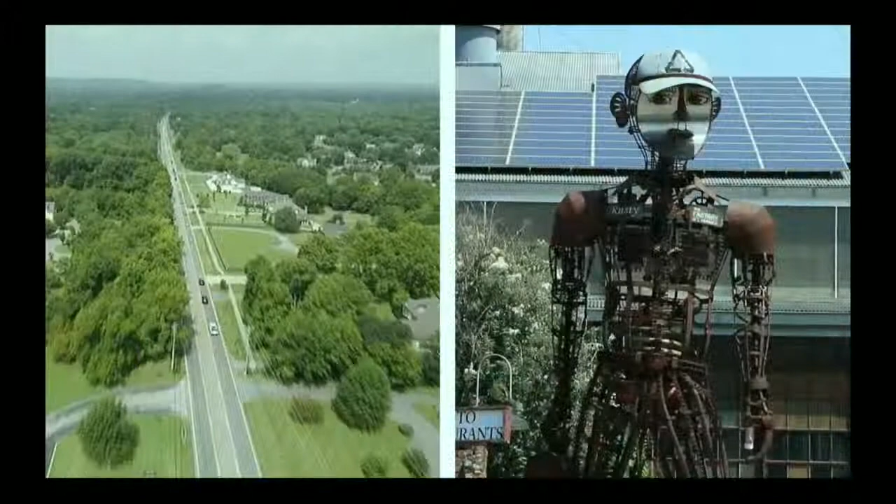Your concept of short is? Two minutes. Okay, thank you, Greg.

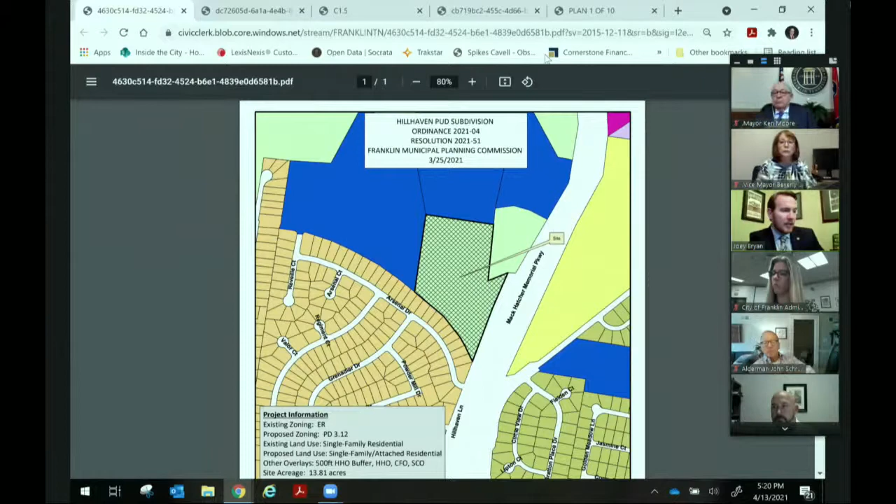As a note, lot 11 is one of the proposed single-family lots, but its location has more than 14% natural slope, which goes against the regulations of the zoning ordinance. So as a condition of approval, lot 11 must be removed from the project. With that, the Planning Commission recommended favorably by a vote of 7-0, and staff recommends favorably to the board, mayor, and alderman to approve with conditions.

Thank you, Joey. Any questions from the board? I think Mr. Gamble wanted to make a comment.

Hi, my name is Greg Gamble, and I'm joined in this meeting tonight with Wayne Weaver, who is the new Director of Community Housing Partnership, and we're so excited to have the opportunity to work with him. Right now he's kind of drinking everything through a fire hose, moving as fast and furiously as possible. Also with us tonight is Scott Harrison, chairman of the board for Community Housing Partnership, and Bert Morton, with CEC Civil Engineering.

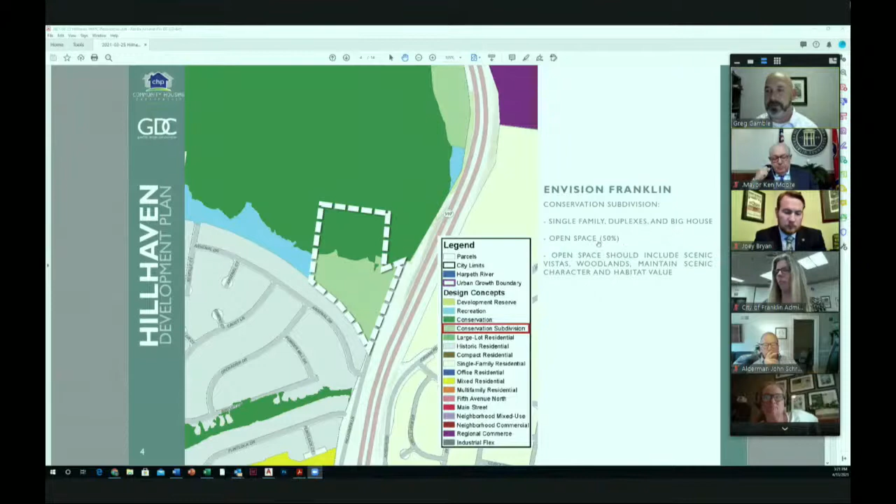I have a real quick presentation to update you since we last talked about Hillhaven at the Joint Conceptual Workshop. As you may recall, Envision Franklin identifies this property as conservation subdivision and allows for single-family duplexes and big house architecture. The open space requirement is 50%.

The master plan has a total of 68.7% open space and includes the Hilltop Preservation Area, as well as stream side buffers and a 150-foot scenic corridor along Mack Hatcher Parkway. There are a total of 8 big houses shown on our plan, as well as 7 single family lots. When Joey referred to lot 11, it's this lot right here, and this lot will be removed as a condition of approval, and we're not objecting to that.

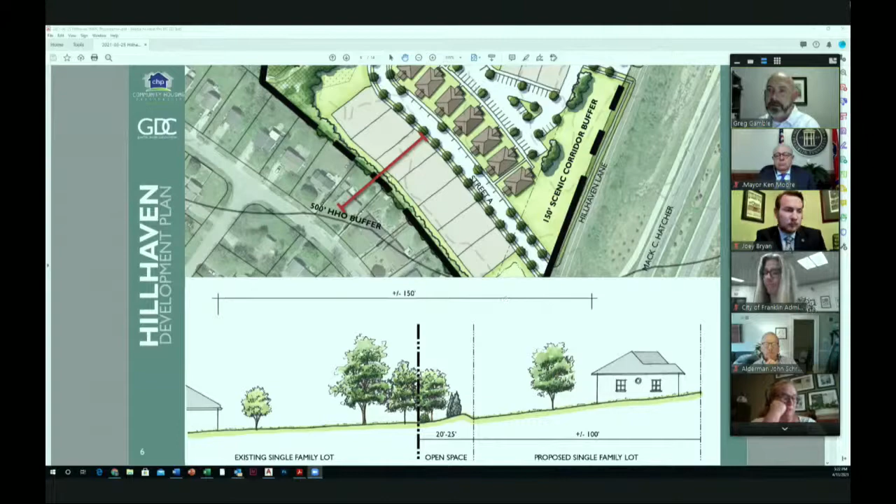With our master plan and the existing site, there's a lot of stormwater running off the hill, off this slope, and right into our neighbors' backyards over here on Arsenal Drive. We're going to introduce a 20 to 25 foot open space area that will include a berm and a swale to redirect that stormwater to our stormwater basin located along Hillhaven Lane, correcting a lot of sheet flow that's causing problems with our adjacent neighbors.

I wanted to give you a little bit of background on this big house.

The zoning ordinance labels it as a multiplex building type, with a maximum of 4 homes per building. We started with a building that's 2 stories tall on Arsenal, which has a width of about 41, 42 feet.

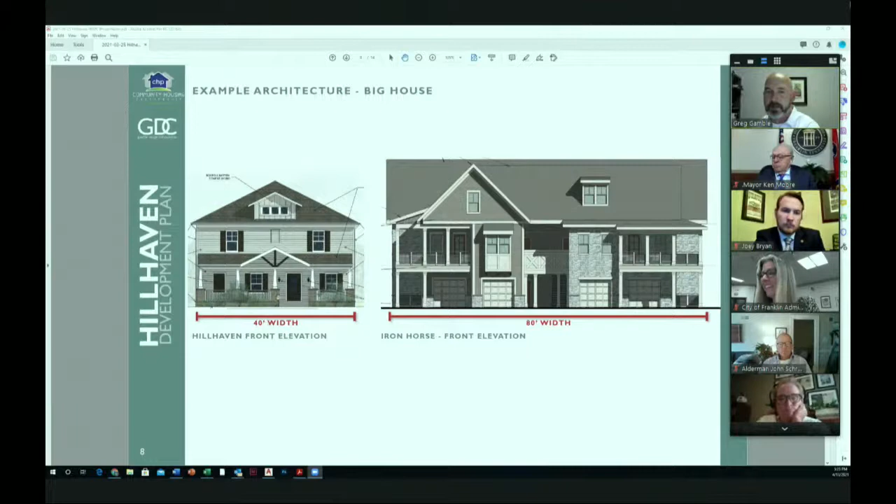We said we want to be compatible with our neighbors, and so this architecture has a width of 40 feet. In comparison, the Iron Horse buildings that are only 2 stories tall have a width of 80 feet, so you can see how the Hillhaven multiplex building is really

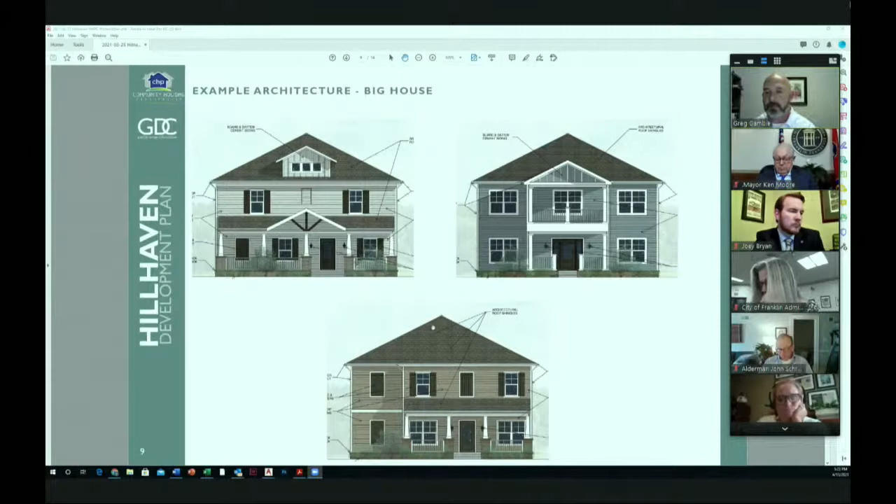designed with more compatibility to the existing neighborhood that it's in today. Our architect is continuing to work through various elevations, showing some diversity in architectural styles. The Planning Commission did ask that final elevations of the architecture come back to them with the site plan, and we're happy to do that. We're continuing to work on final design of the architecture for not only the big houses,

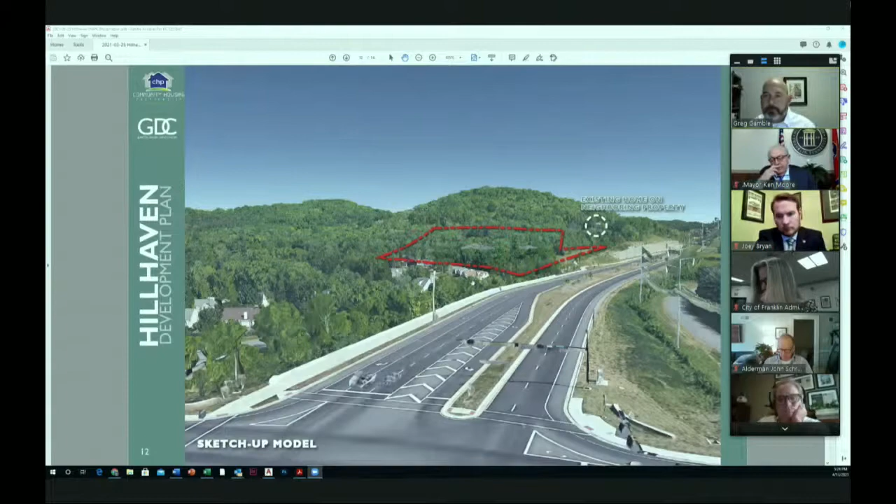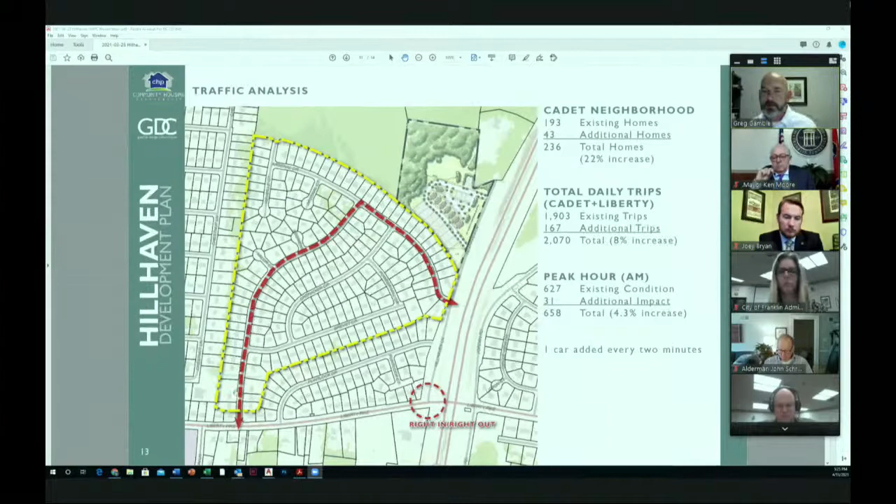At peak hour, which happens to be the AM hour where the most traffic is at this intersection, there's a total of 627 vehicle trips. We'll be adding 31 trips to the peak hour, an increase of 4.3%, about one car added every 2 minutes to this intersection. So really low impact, low additional traffic volumes there.

But we're happy to answer any questions you may have. Mayor, and I'll yield back.

No questions. Joey, did you want to add anything as far as development plan or impact fee? Or did I hear somebody want to ask a question? Vice Mayor, did you want to ask a question? Yeah, I did. Go ahead.

Can you go over, Greg, pull that map up again and tell us where that stormwater basin is? Okay, where's the road going into it? Right there, can you point to it? The road is, it's hard to see, it's so small.

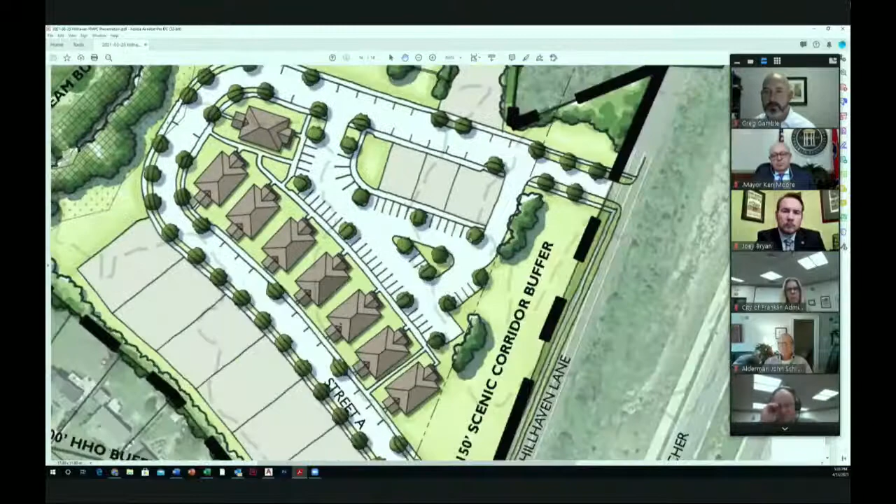Hello? I can't hear anybody. I don't know if you're on, Greg, or not. Nobody's saying anything yet, but there's your stormwater basin. All right, so yes, here's the stormwater basin located here in the lower left corner.

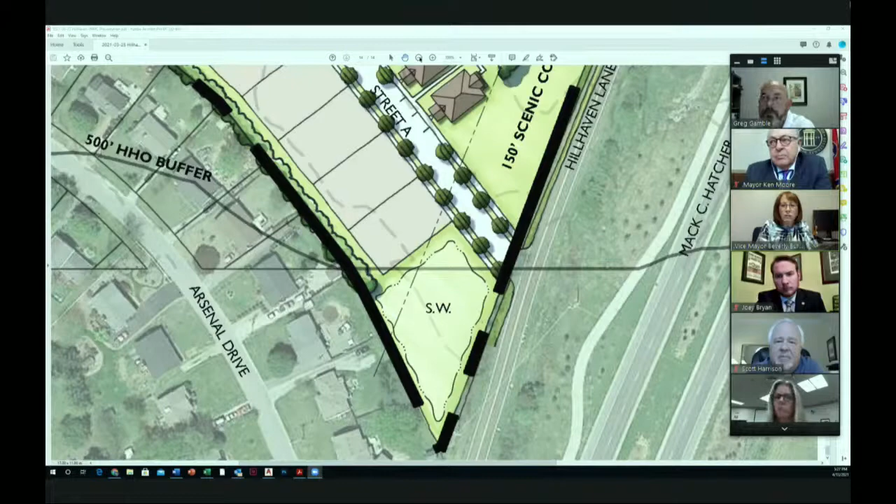Yeah, I don't understand why we continuously put stormwater basins on these roads. That's the first thing we see. It seems to me that we're becoming a city of stormwater basins all over the place, and I don't think they're attractive to put out front to see on a development. I just think we can do a better job, but I don't know. You're driving into it there, and that's the first thing you see.

And we have to follow the terrain and topography on this plan. Right, water runs downhill, it is. It's running downhill this direction and then running across down here in this direction. So I know it has to, but how is that designed? I mean, is it retention or detention? It's detention. There will be no standing water in this.

Detention. So how are those culverts? I've seen so many culverts all over town that are just huge. And I mean, it's what you see. Instead of putting it into the side of the hill and hiding them, doing a better job of them, how are we regulating that? I just have some questions about that because I don't think we're doing a really good job with those.

When looking at a development of really any size, every 2 acres has to have its own water quality feature, whether it be a bioswale, rain garden, or some kind of water quality device that cleans the water. Ultimately, you have to detain water on your site if you're creating more impervious surface. So this is really more for the detention of the stormwater after it's been treated through those water quality areas.

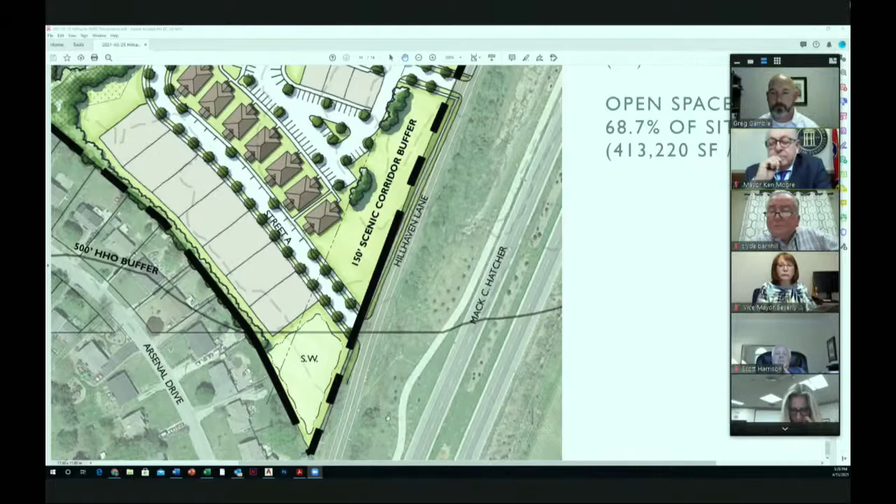I just wanted to bring up that the 2019 zoning ordinance and our zoning ordinance today does have material requirements for those walls associated with the culvert, so that they should be clad in brick, stone, or natural stone, because we realize the appearance of some of them in the past have been less than aesthetically appealing when visible from roadways. And Kelly, the culverts in those areas, they're supposed to be set back into the hill, not stuck way out. And then you have this.

So is that also the case, that they're supposed to be back in towards the bank of the hill? I would defer to the engineering department for that type of question. The zoning ordinance really relates to what the cladding should be on the stormwater features.

Well, I would just make the comment, we don't need to discuss it any further. I just would make the comment that engineering ought to take a look, stormwater, take a look at that. So when it's developed and designed, that it's put back into the hill. I think that's where it's supposed to be. And a lot of times they get put out, so they're massive and they're visible. And I just think we should address that. That's all. Thanks.

And it's definitely an engineering issue. So, they can address that. Thanks.

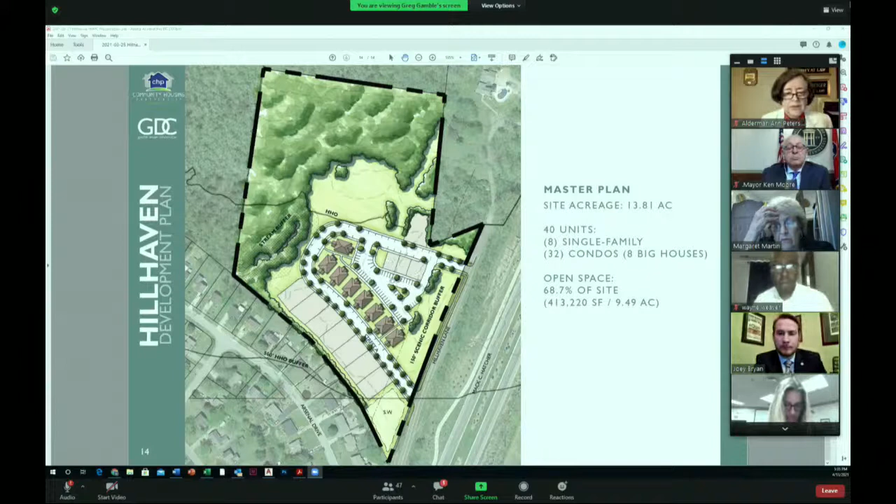Not covered parking. No, parking just for the residents.

There's minimal impact on the traffic from this development. And of course, that's a very unusual intersection with Hillhaven and Liberty. So is this just maybe the chance to improve that access management there by forcing a right in, right out? We didn't have that previously, I guess.

I'm happy to answer that. We really didn't feel comfortable with the proximity of Liberty Pike and the Mack Hatcher intersection there with the entrance here on Hillhaven. It's something that was done when Mack Hatcher was built many years ago. And we've noticed some dangerous turns - left turns in and out of there are typically your most risky movement. So reducing that, any additional density just increases that risk.

So taking that out to a right in, right out, still providing access through the existing neighborhood seemed to be the safest approach. And Alderman Speedy, we pulled the accident report for that intersection in 2020 alone. There were 10 accidents. They were all minor, thankfully, but there were 10 accidents at that intersection.

Okay, we need to move along. Did anybody have any questions about the parkland impact fee? If not, we're going to go on to item 6.

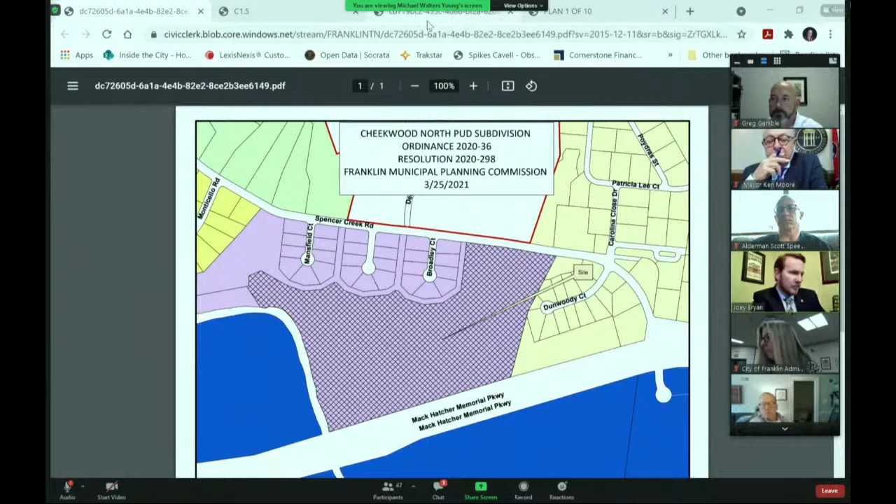The current administrative and recreational services on the property will be relocated to the Cheekwood South PUD subdivision on the southern side of Mack Hatcher. So for the Cheekwood South, the subject property consists of 53.52 acres. Again, it is for a new golf course and facilities for the golf course.

The property is owned by the city of Franklin and currently vacant. Envision Franklin places this parcel in the recreational design concept. Per Envision Franklin, this concept supports both private and public recreational opportunities. It further states that new development should be interconnected through bike lanes, multi-use path, and sidewalks.

The plan as proposed provides a safe connection to the parcel on the north side of Mack Hatcher and connects with established local trails as well. In addition to the course itself, the administrative offices, clubhouses, and pro shop for both this development and the Cheekwood North are located on this property.

Any golf balls that are hit into the surrounding jurisdictional features, including wetlands, river streams, and others, shall be considered an illicit discharge, followed by notices of violations and civil penalties per the City of Franklin Stormwater Ordinance. Therefore, the city will require additional information regarding nets for the driving range at the site plan submittal to ensure that proper protection of the Harpeth River and surrounding wetlands is maintained.

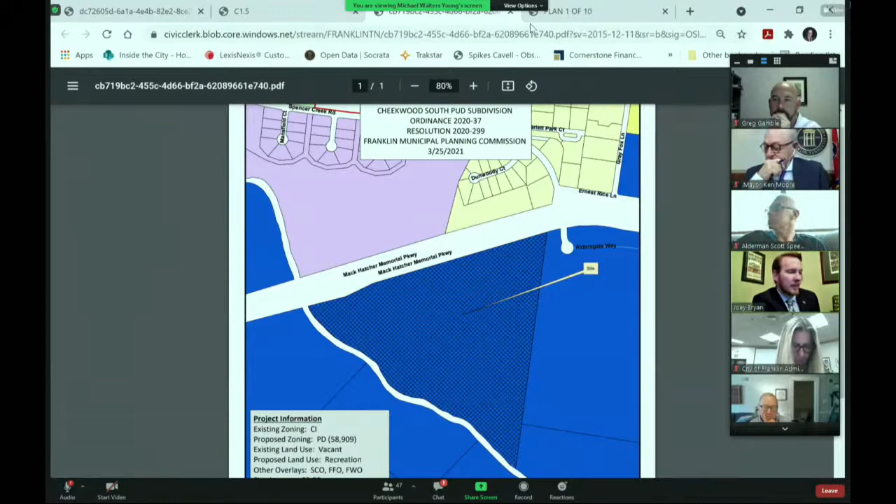So Planning Commission unanimously recommended approval, and staff recommends approval as well. Happy to answer any questions. Thank you.

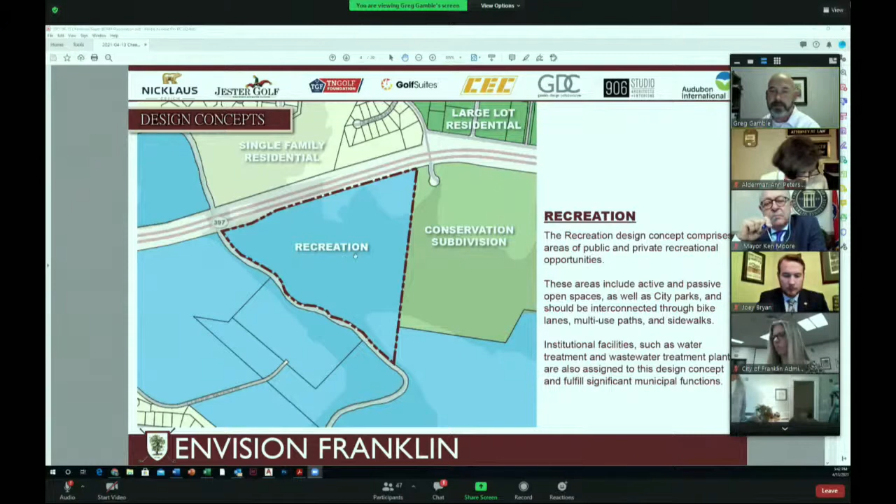The property is being looked at and designed as a master plan with both the north and the south of Mac Hatcher. There will be a golf cart connection between the two that will be underneath the Mac Hatcher Bridge. We're talking specifically first about the south side, which in Envision Franklin is identified as recreation design concept.

We are requesting a rezoning to planned district, as Joey mentioned. This starts to paint the picture about how these properties are master planned together. We are going to be relocating the existing clubhouse that is directly off of Spencer Creek to the south side of Mac Hatcher. The access will be off of the existing cul-de-sac here at the signalized intersection.

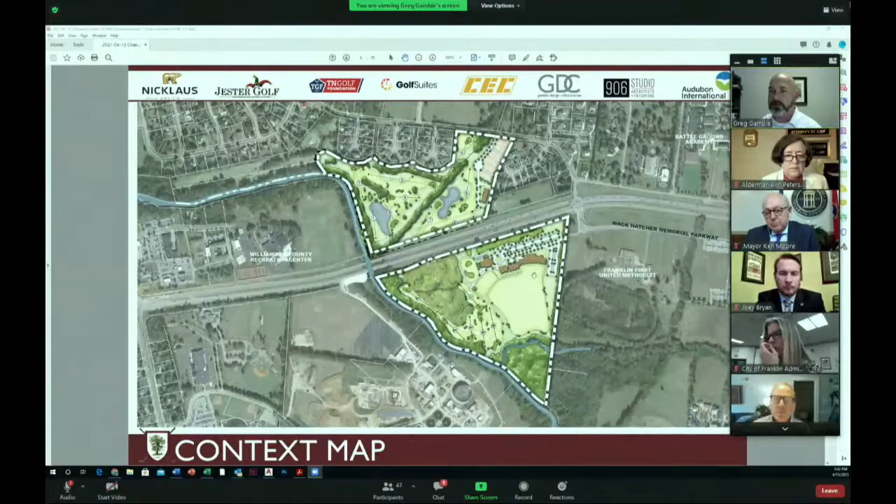The south side will include a driving range, as well as a chipping area, a new large putting green area, and a player development course designed by Nicklaus Design. The facilities will include a clubhouse with covered hitting bays, a golf performance center, the golf house, golf hall of fame, and the golf pro shop.

I'm going to turn it over to Mike Hathaway, who's going to talk about the inspiration of the architectural design. So I'll keep my comments brief, but as we look at this site, we have taken the approach of a high-end equestrian farm facility. You'll see some of the architecture as we look at what is going to be the view down this main drive as you come into the project.

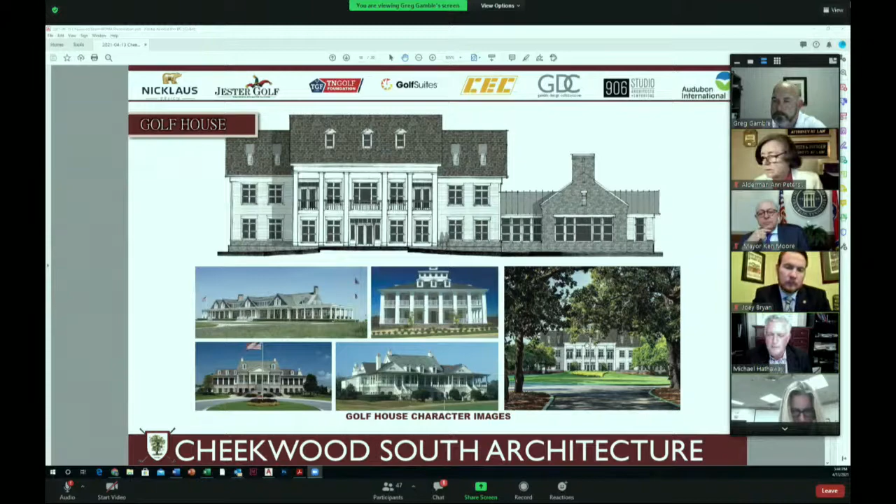The very southern, classical southern style manor house will be the main headquarters for the Golf House of Tennessee, as well as the Golf Hall of Fame. You can see on the bottom right, the image as you're looking through the tree line drive coming up to the facility. We'll design very classical details, very much in keeping with the vernacular and context of historic Franklin and a farm type facility.

And then the other building is a clubhouse building that will be where the driving range is and gathering spaces for families, as well as a performance center. If you go to the next slide.

That building is the second part of this equestrian facility, designed to appear as an equestrian barn architecture that has grown over time. There's a story to tell. You can kind of see the scale of the architecture, buildings that are connected to other buildings, and then ultimately to a larger facility. Just trying to give a story of what it could have been as an equestrian farm center.

We're going to be using stone, board and batten materials, things that are common for a farm facility. And then you can see at the bottom a starter house, again, very much like what you would see in an ancillary farm building, much like what you might see at Harlinsdale, which is a good context for you guys to think about for this.

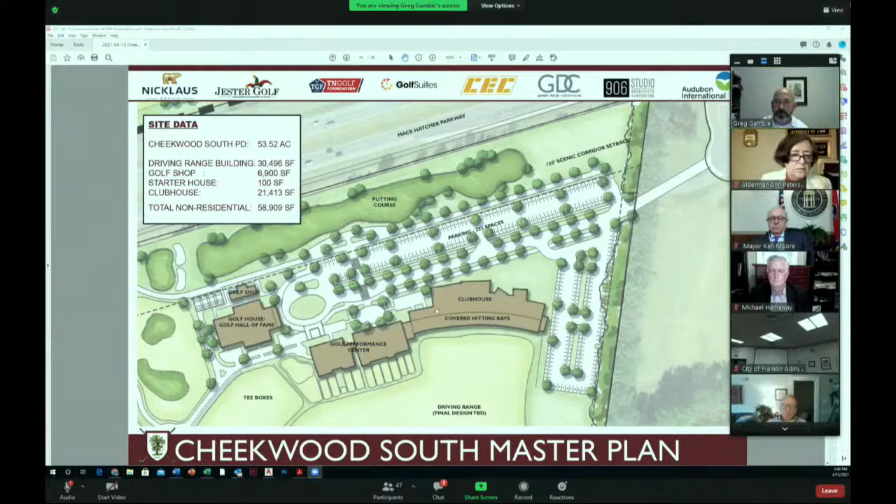If we move on to the Golf Performance Center—this is the visual of the golf house there, Greg. Here with the Golf Performance Center, this is kind of the nucleus for teaching. We have teaching bays, we have golf team bays. There's such a need in our area for high school, junior high, and even some of the smaller golf teams for the colleges that just literally don't have access to golf.

Also, we have a Titleist Performance Institute fitness area. We'll be proposing small golf retail. If you hit the next slide, Greg.

Also, we'll have rooms for boardroom type meetings, also a banquet room. We're shooting for around 100 people or so to accommodate. Also, the building will have a deck overlooking the golf course.

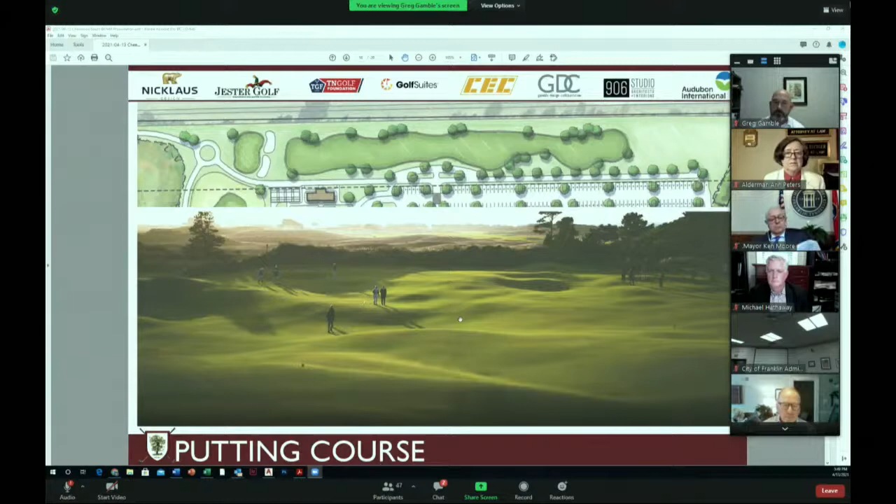And then this current picture that you see here, a little bit of an overlook of what people just say is a 2-acre putting green—this is kind of the look and feel of it. It's such a community gathering place. Many people can spend long afternoons there, multi-generational families, and that type of activity. Okay, next slide, Greg.

We also are going to propose a natural grass hitting tee. The unique thing about our hitting tee is it will also have the same technology out on the natural grass that we will propose inside of all of our buildings. If you notice next to the individuals, they have a little stand where you can put your own personal cell phone or tablet that will also give you the same technology.

Now, last time we were before you, we were asked about netting and lighting of this facility. If you look to the left, this photograph is actually off of TrackMan's page that they gave to us—TrackMan is the technology we're speaking with. You can see as we keep the netting the same height as the trees and landscaping, it does disappear somewhat into the site. But that's our intention, to create the netting with that same level.

In the top two pictures, the picture on the right is Top of the Rock in Branson, Missouri—that's also a Nicklaus Design product. That is how it is lit at night versus the picture on the left, the daytime. So you notice it's not stadium lighting, it's all broadcast against the ground, and it's our goal to maintain the dark sky guidelines for our lighting as well.

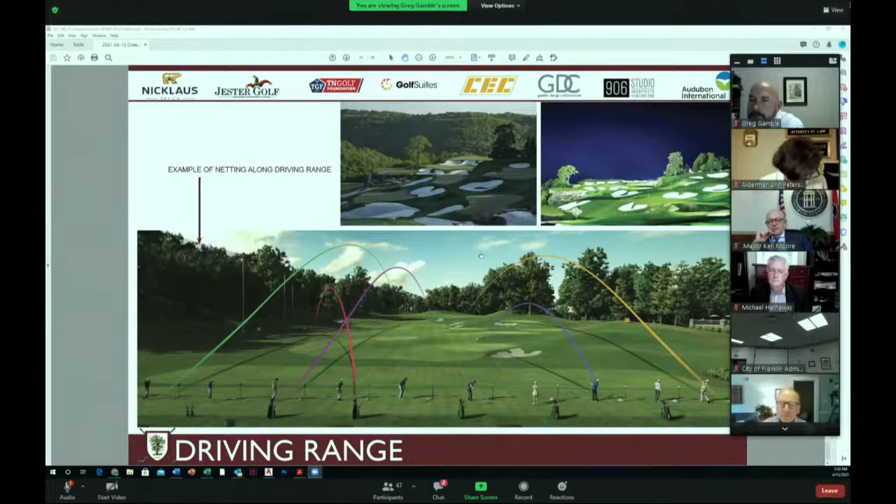Okay, next slide, Greg. So as we come to this—and this is our last point, I'm trying to keep it as quick as possible, Mayor. I apologize for running a little long.

Working with Nicklaus Design, we are actually trying to brand and create the flagship Golden Bear multi-generational golf experience on this property. This is the first of its kind. Golden Bear is teamed with myself and GolfSuites to create this. It'll have our covered hitting bays, restaurants, community event centers inside, and the whole idea is to create a family group type golf experience.

So there was a lot said, so I certainly appreciate the time and send it back to Greg for any questions. Mayor, would you like for us to review the north course, or do you want to answer questions on the south course first? They're different. Go ahead and move on to the north, and then we'll go for questions. Okay.

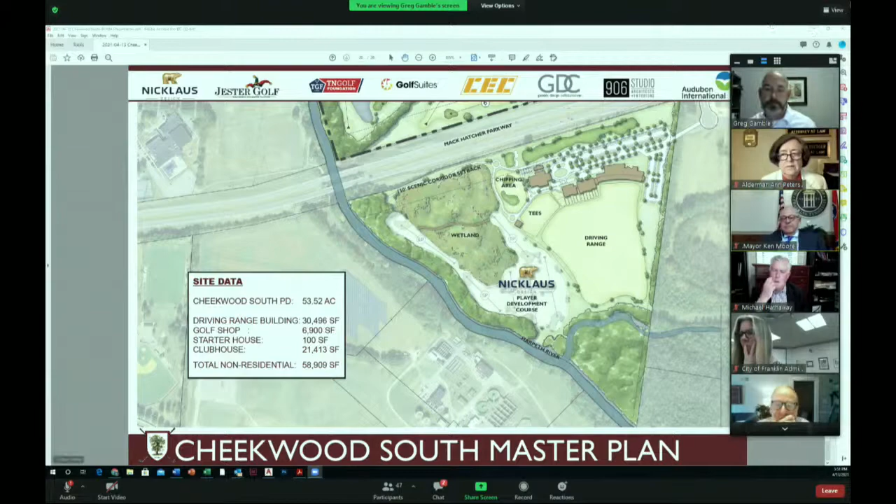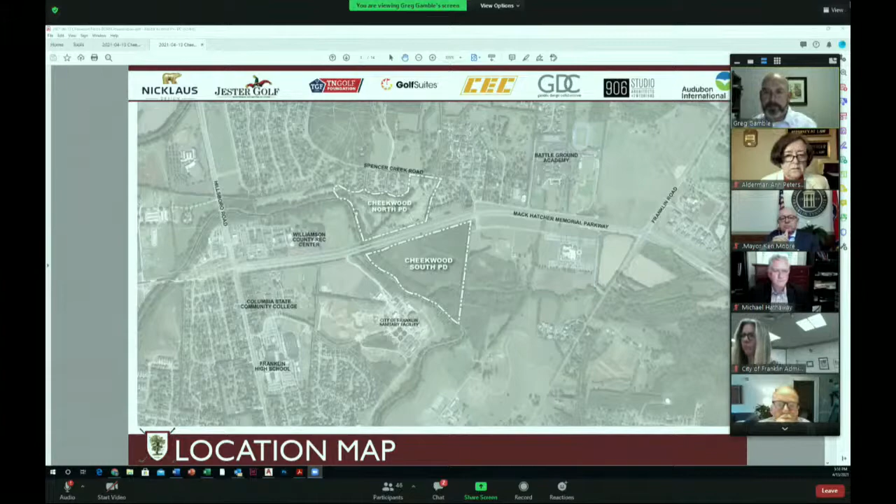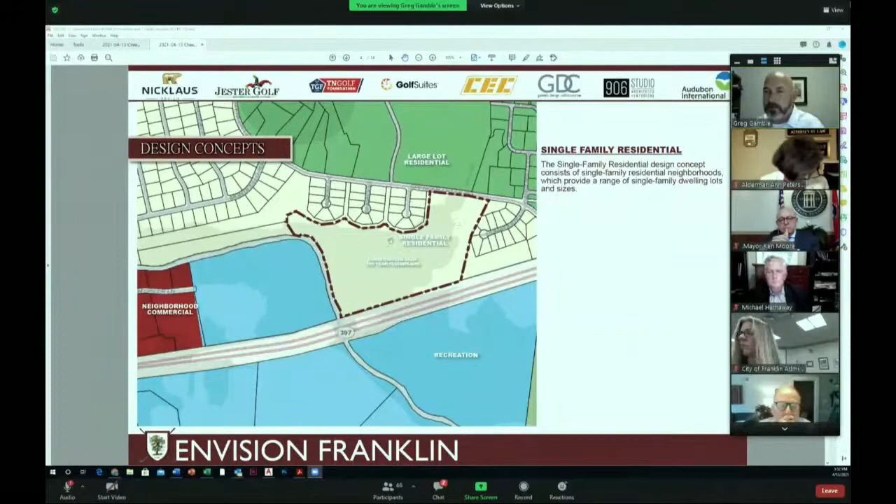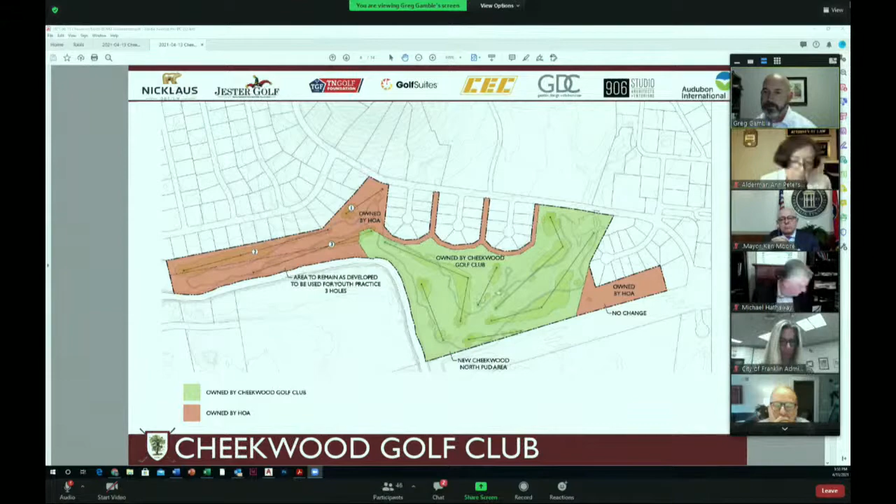The area proposed for change is the area owned by Cheekwood Golf Club. This area is accessed from underneath Mac Hatcher via this golf cart path. All of the cart staging and Golf Pro Shop check-in will be on the south side of Mac Hatcher, with access to the golf area underneath Mac Hatcher to this side.

On the right side, we're proposing a new cul-de-sac with 6 single-family detached homes and a golf maintenance facility. The proposed buildings and lots are predominantly outside the 100-year floodplain. There may be a need for slight manipulation of the floodplain, but compensation will be provided at 150% for these areas. The six homes will all have alley access to garages located behind.

There will be 2 proposed homes fronting onto Spencer Creek Road. This area is currently where the golf shop is, the cart staging, where the lawnmowers leave in the morning. It's adjacent to 2 existing lots off of Dunwoody Court, both kind of side-oriented to this space. We're committed to leaving the existing trees alongside that property boundary in a 20-foot landscape easement, and will enhance that buffer with additional landscaping.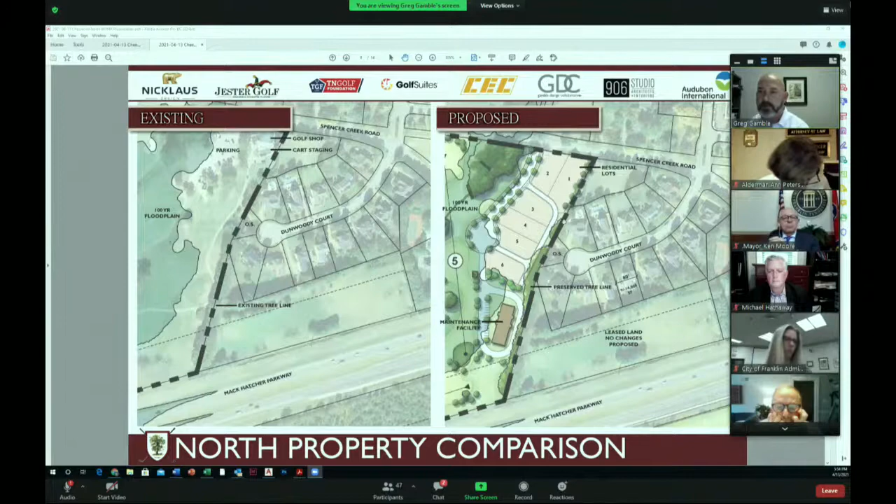So Mike, I'm going to hand it over to you to talk briefly about the architecture on this side. All right, thank you, Greg. Building on that rural equestrian farm character, we've got 3 structures on this side of the property.

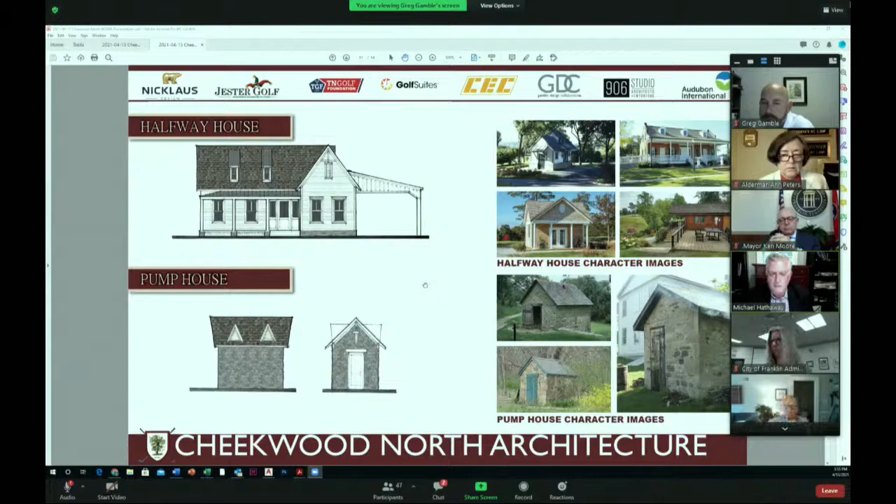Then the pump house, we used the direction of spring houses, stone spring houses in the area and other southern rural areas, as inspiration for this architecture. That's the intent for the pump house.

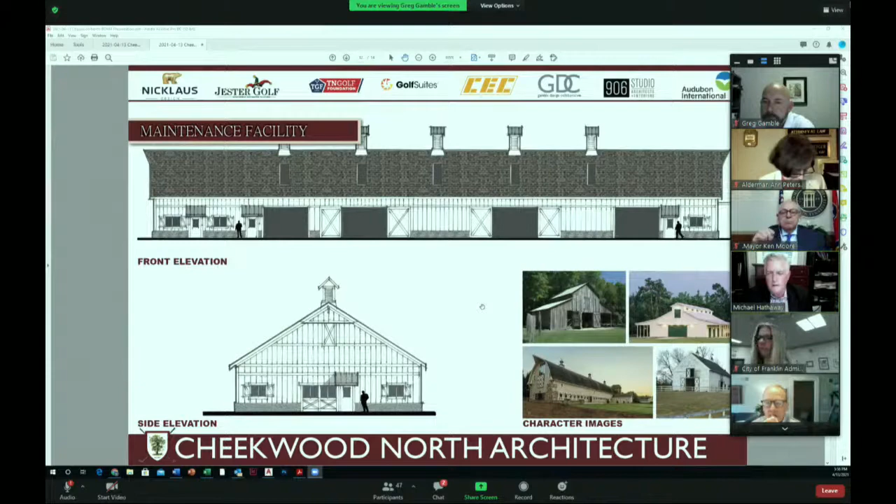Then we've got a maintenance facility that'll obviously be a modern facility on the interior to handle maintaining the whole property from both sides. But the aesthetic on the exterior will be very much a rural farm approach, similar to the character images shown below. We'll have a pre-engineered building clad with board and batten, rural barn type details, vents on the roof, everything that would give the indication it's an existing barn that would have been there.

On the residential lots, our intention is to create high-end Southern classical type architecture with large porches, since we're facing the golf course. We want to create an amazing experience for these homeowners, so they'll have large front and side porches, large amounts of glass looking out to emphasize that you're in a very special place, a world-class golf facility. We'll use brick materials, horizontal siding, all the things you'd expect in a historic property.

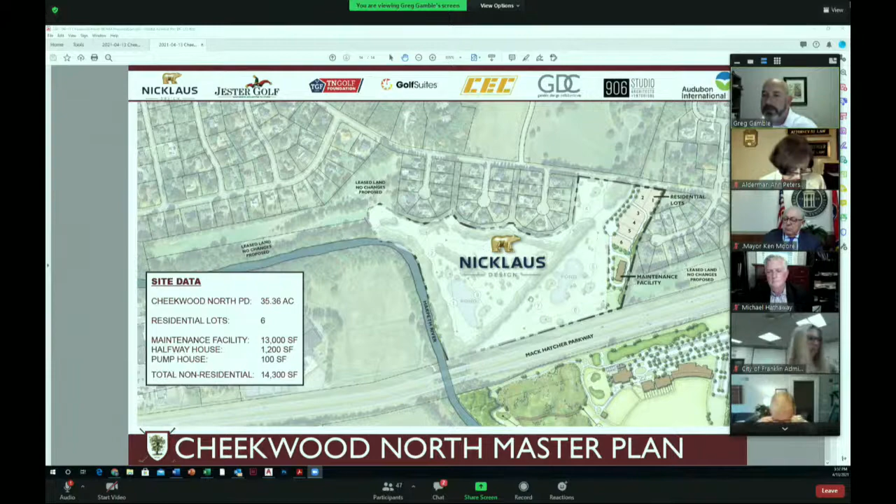This north side of the property, again designed by Nicklaus Design, is a 9-hole par 3 course. We'll have the existing 3 holes used for high school play, but the concentration of public play is primarily here in the 9-hole par 3 course. Mayor, I'll hand that back, but happy to refer back to slides if needed.

And I've got Alderman Peters.

Whenever I was looking at this and drove out there, I had heard about some problems with water coming over the road. That looks like it's on the city of Franklin and Williamson County. Who is in charge of that road there, of Spencer Creek, right in that area?

That is a city road. It was developed under the county originally, but it is now part of the city. We are looking at longer term issues around how to deal with the water. There's a structure under there that is rather clogged, and we're looking at a longer term solution and improvement to that roadway and the flooding issues. I'd add too that it's in floodplain, so we've met with the street department and Mark Hilty, Public Works, and we're working on an engineering design to bring that into compliance so we can stop that flooding from happening. We're actively looking at that right now.

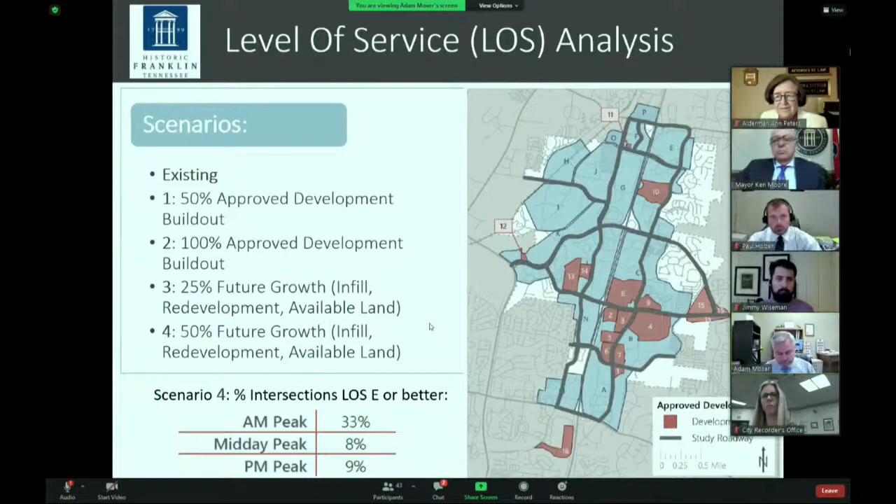And then the proposed recommendation areas that we looked at going forward - obviously infrastructure for all of them, what we could do with our existing infrastructure, whether it's widen, lengthen turn bays, do things like that. But we also looked at policy recommendations, approval practices, trip reduction strategies, and multimodal including transit. So these were different recommendations in the final report.

And obviously the recommendations, we did a timeline on those to try to see where we could fit them in as we go down the road of development. Our consultant KCI divided them into short, mid, and long-term recommendations. This was basically done because some of these other recommendations would require further study and analysis. For example, the micro-mobility pilot of electric bikes, we'd have to do a little bit more study on our infrastructure, sidewalks and bike lanes and things like that. So they divided them up into those different terms or timelines.

It's nice - we did actually implement recently in the latest street standards, which will be the next presentation that I think Joe or Jimmy is going to talk about. We did revise our level of service guidelines in our traffic impact study due to, as everyone knows, we've been presenting on already existing level of service E's or F's that are in our area, and what we can do to possibly improve those, or at least keep them at the same level of service they are currently. And that might include infrastructure improvements, or reducing the development trips. But we have implemented those in our latest traffic impact study guidelines.

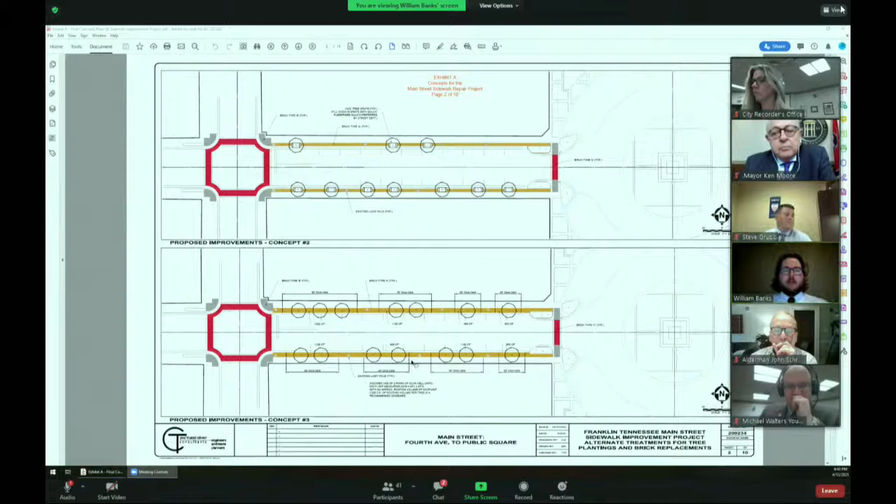Concept 3 is a lot more work, where we would install Silva Cells. We would tear up the sidewalk. The Silva Cells would allow room underneath the sidewalk for the roots to fully grow, and these trees could become fully mature trees.

Concept 4 seems to have a lot of internal staff, good feedback from staff, but we know there are some drawbacks as well. Concept 4 proposes we move the street trees out into bioretention planter areas. These would be new curb extensions out in the roadway.

Some of the pros and cons: the street trees, by doing these bioretention areas, can have way more room to grow, just like Concept 3.

This means we don't have to replace them as often as we usually do. We get a wider sidewalk, so we have a bigger ADA path. We know some areas in downtown can get a little cramped because of the furnishing zones, where benches, tables, and seating are utilized by some of the businesses, so this would open up the sidewalk for that.

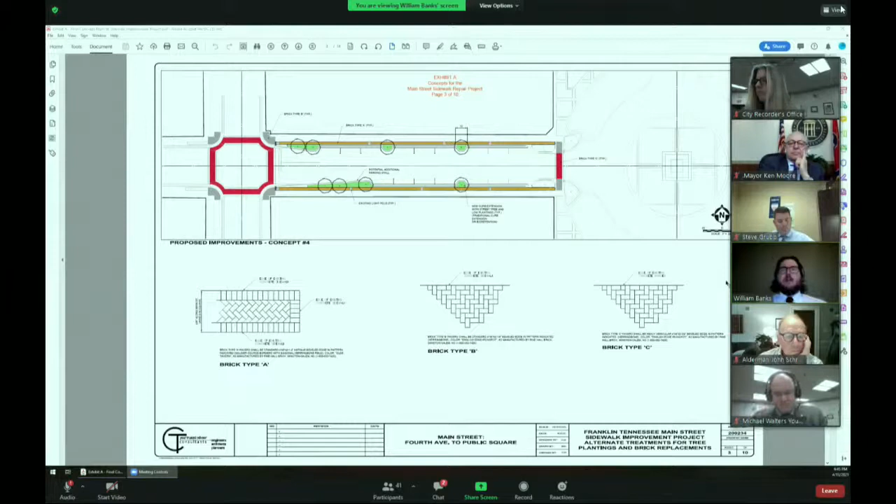The second big item is, what do we do with the engraved memorial pavers? I'll skip some of these sections since we're running a little bit late on time.

Before I get to the memorial pavers, this is the existing layout of the 4th Avenue intersection, looking towards the square with the street trees in the sidewalk.

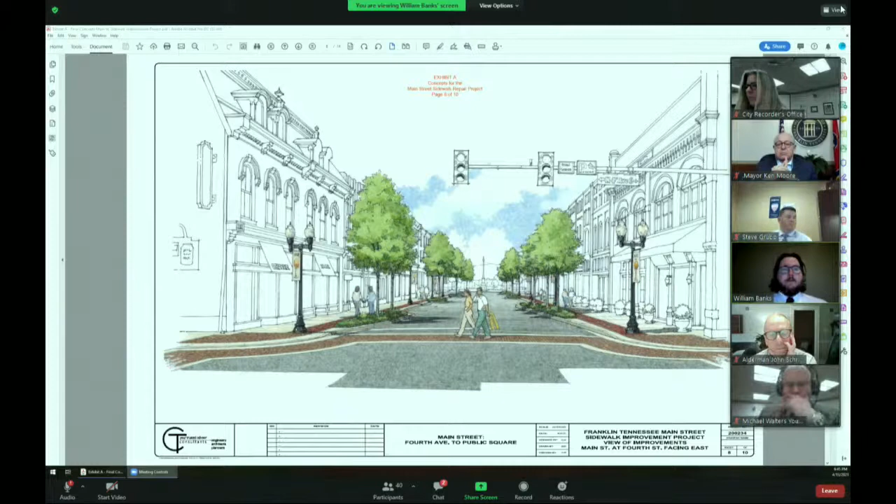We had artist renderings showing Concept 4, because we know this would probably be the biggest discussion point of the street tree issue, showing the street trees moved out into these curb extensions. A close up example: the roadway drainage could still flow into this and through it, but it does have a wider sidewalk area and frees up a wider furnishing zone for the businesses.

So that's a quick synopsis of the 2 big concerns with this project. And with that, I will turn it back over to Steve if you have anything else to add. Thank you, William. I appreciate you running through that presentation.

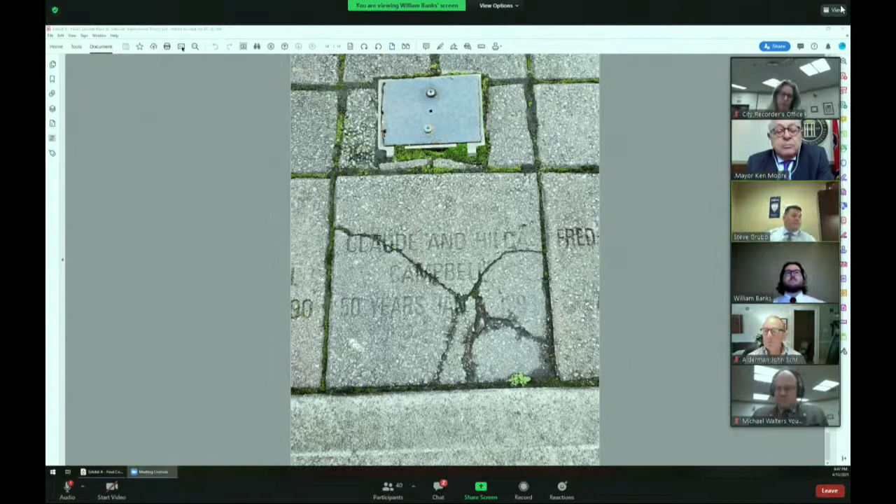Now we'd certainly like to open it up for discussion. As William indicated, we feel like those 2 areas, the memorialized pavers and moving the street trees from the sidewalk into the roadway, would provide the most feedback, or that's where we need the most feedback.

Well, I tell you what I think we'll do tonight. I anticipate there's going to be quite a bit of discussion on this. And I think that was a great presentation to give us some vision, William, to let us think about it. We'll bring this back to the next work session and talk about it at that time. So we're going to... Mr. Mayor, I have one quick question before we bring this back.

When you bring this back, could you also bring back to us information on, if the trees are taken out and put out so we get more sidewalk area, then what kind of trees are put back? They're not going to be the same trees, I don't think, because I don't know how you can transplant them out. And if you do, what size trees would they be? Because that's going to change the entire look of Main Street and the landscape look of the trees. So can you talk to us later when you come back about the trees - the size, the type, the shape, and how you would transplant them or what you would replace them with?